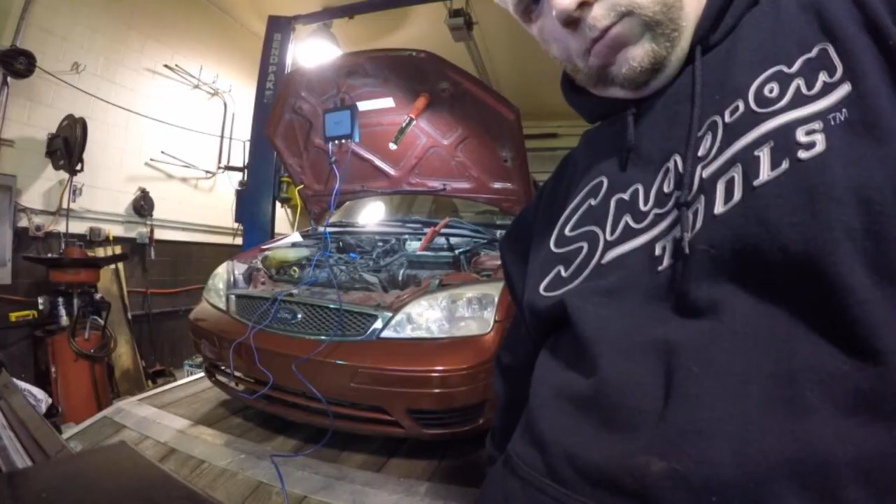All right. I don't know how much record time I'm going to get. I don't know how much room's on this SD card. But I have a 2005 Ford Focus 2.0, crank but no start. I do have a signal. Now let me try to find the crank sensor on this.

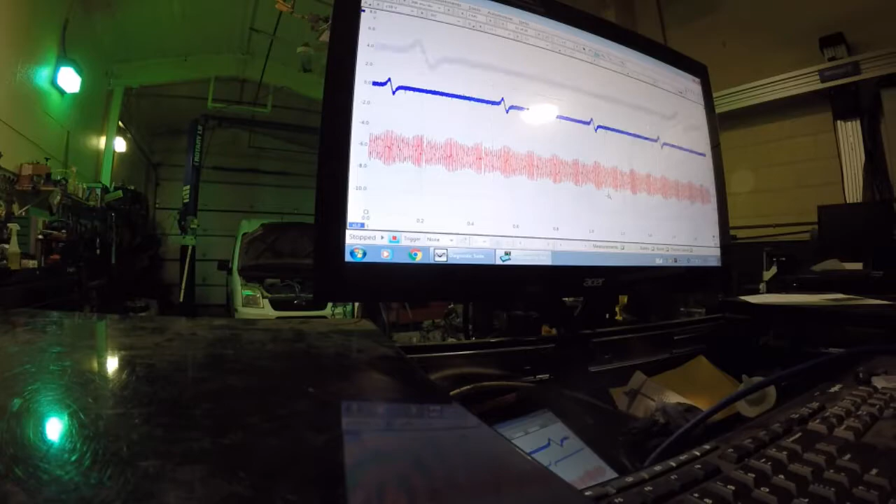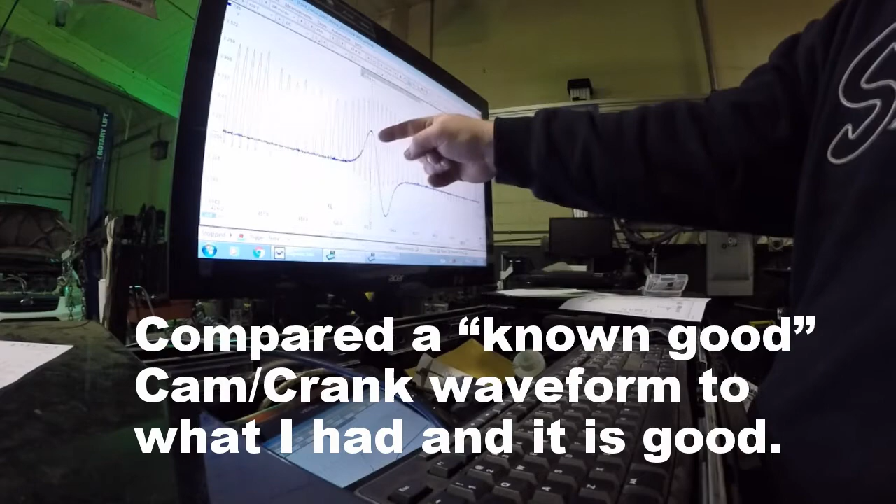Well, cam and crank signals are good. That's apparent. So let's go here. Let's zoom in and see what we get. Okay, so this is what I have. I did find a known good. This is perfect. I have 13 lines from my sync signal to the crest of my cam sensor. I have 13 pulses, which is good.

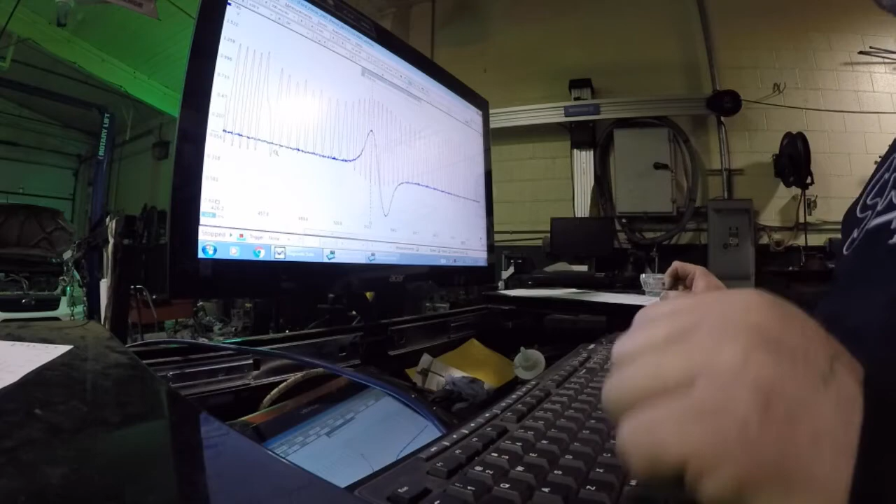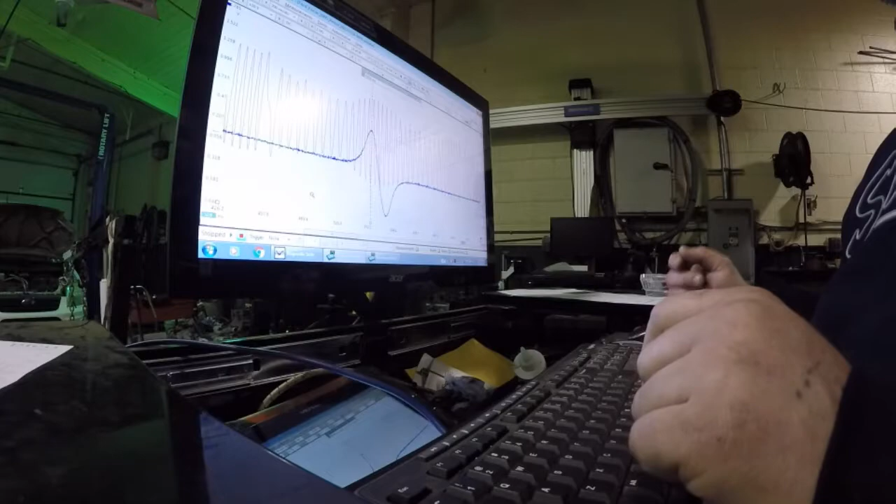The only difference I saw on the known good was the ramp on the sync for the crank sensor. It's opposite. It ramps up instead of down. But I think in his case, he hooked up to the crank signal wire instead of the signal return wire. I'm hooked up to the signal return wire.

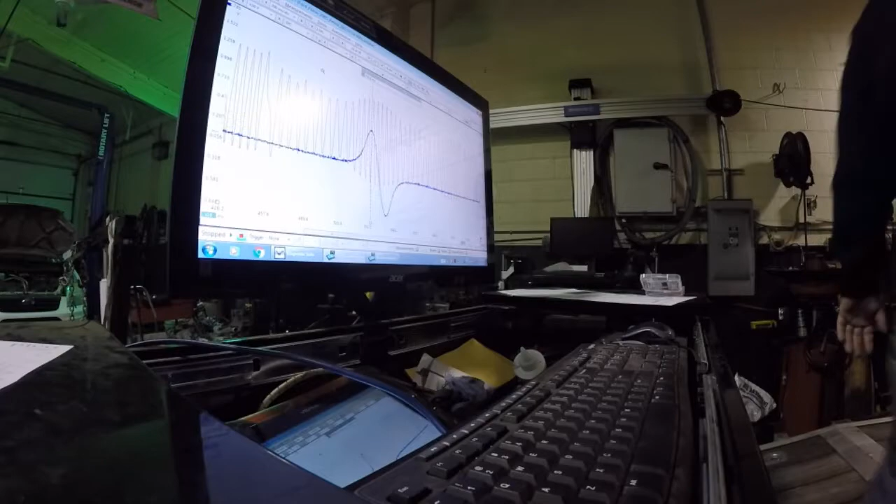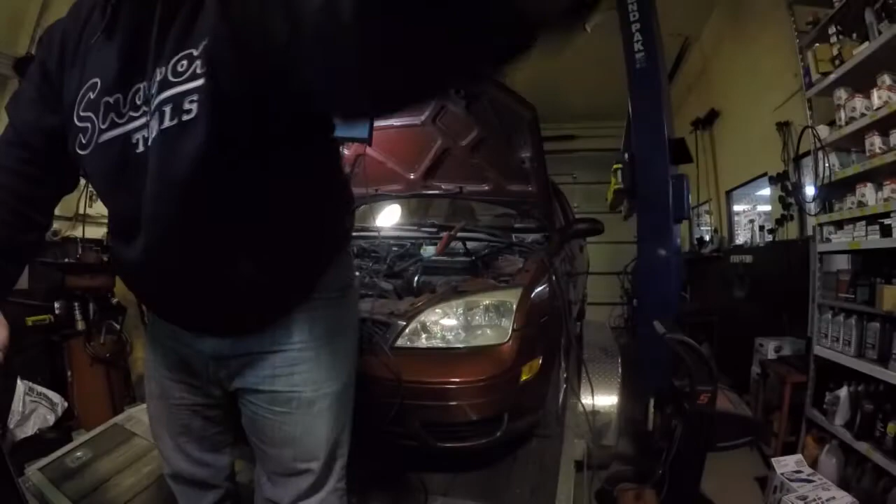That's why that's reversed. So now I'm going to hook up to the number one fuel injector and number one coil on the front. So I do need to hook up an attenuator for my coil. It's a 10-to-1 attenuator. 10-to-1? Yeah, 10-to-1. Okay. Whenever you're working with ignition coils, always use an attenuator. You can easily fry your scope.

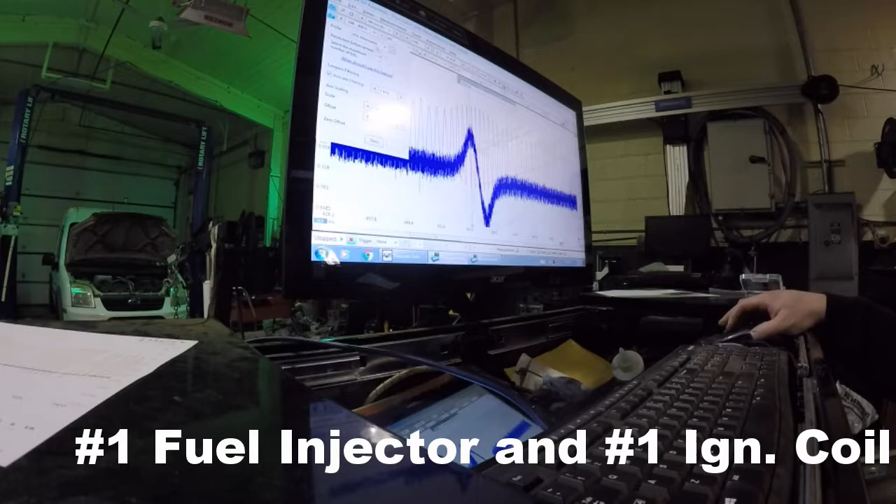Let's see. We're going to tell this we need an attenuator on one. It's a 20-to-1. Oh, it's a 10-to-1 attenuator. Sorry, 10-to-1 attenuator. And that's good where that is. This one here, we're good where we are, but we need to bump this up to 100, give or take 100 volts. Let's run it just to see where I'm at. Let's get rid of this. Okay.

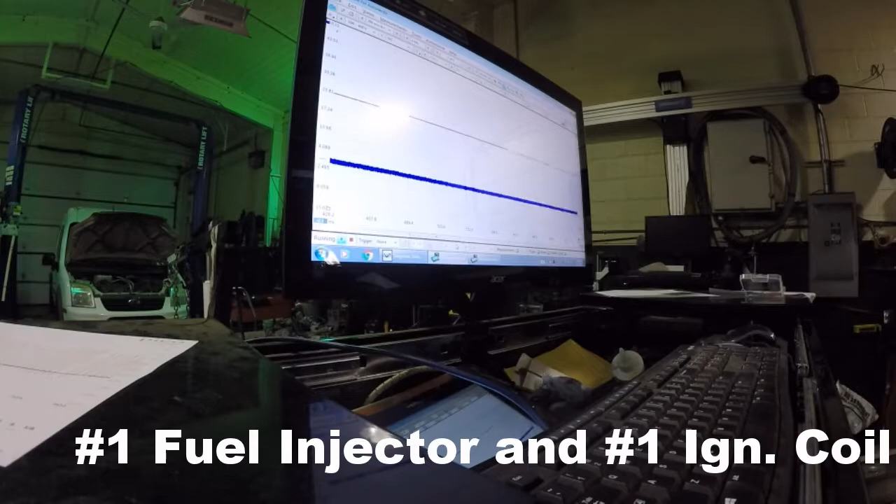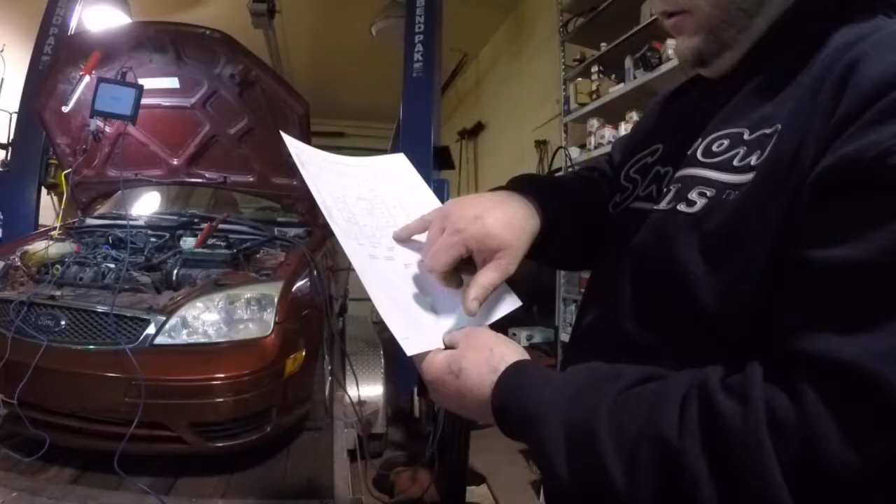You know, we can check one thing. Let me turn the key on. Because you see, I have 0 volts on both of these. And see, nothing changed. C1403. C1403 is the power hold relay. That's the relay that sends power to the injectors, to the coils, and feeds power to the computer. So that would be this relay right here.

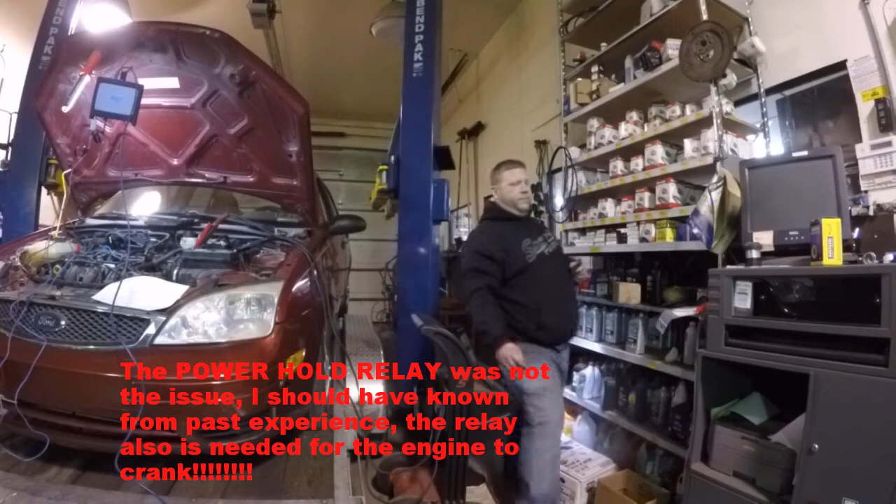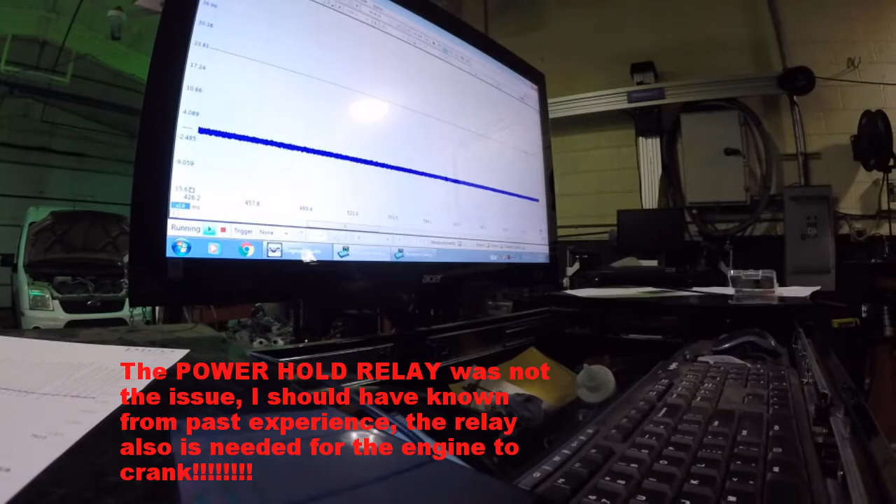I'll be able to tell as soon as I turn the key on. I'm going to focus you guys on here. And you'll see right now, you can check out the red wire. I'm at 0 volts, so that should go up to 12 volts as soon as I...

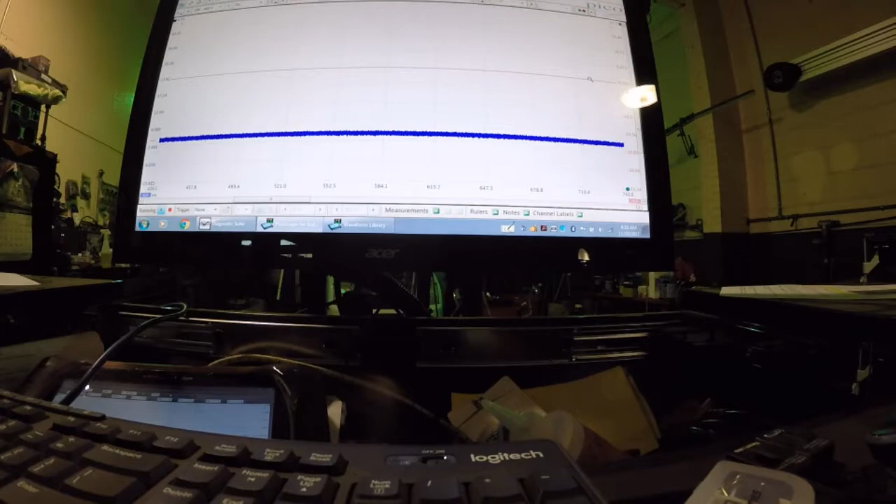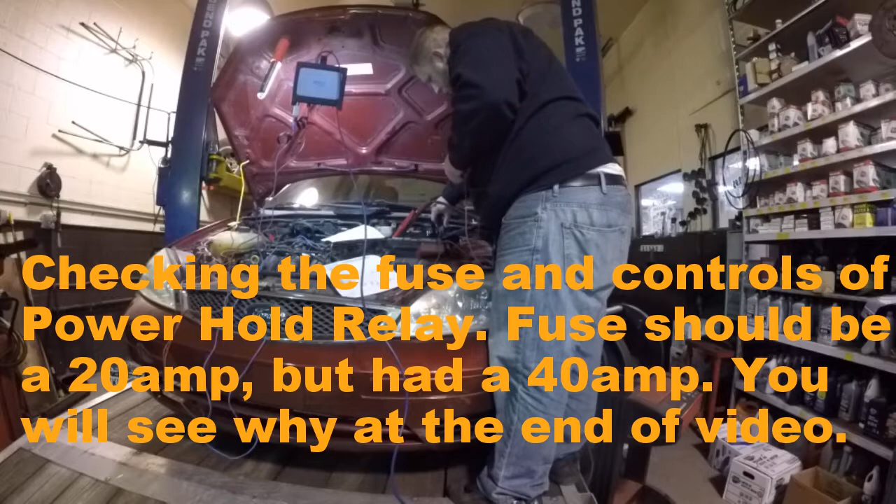Okay, well, I found the fuse. It's supposed to be a 20 amp maxi fuse, fuse number 9 in the battery junction block here under the hood, but it has a 40 amp fuse in there. 40 amp range, which has me concerned. And this should be power at all times, so 12.7 volts and 12.7 volts. Okay, so that's good.

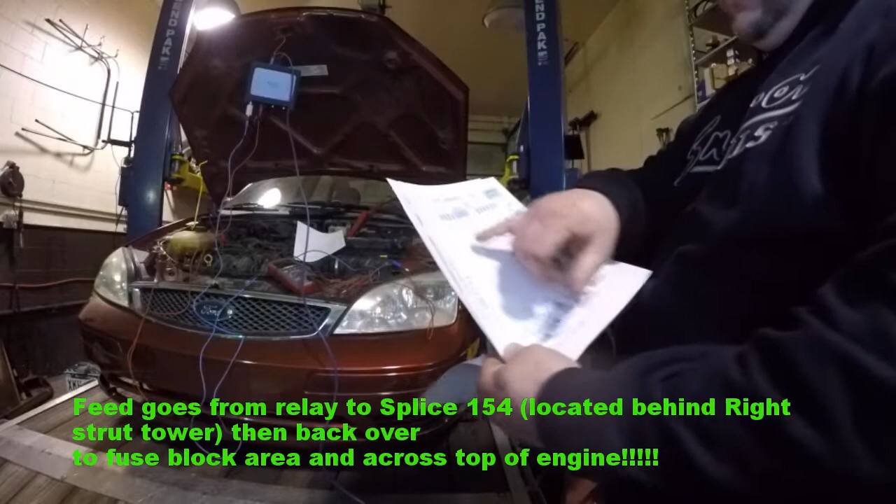So right now I know I'm not getting any power to any of my injectors, any of my coils, nothing. So it's a power feed problem. Here in the beginning, from the power relay, the power feed goes down to splice 154. This splice is down near the washer pump motor. And from there it splices off and goes to the computer; there are 2 feeds from the power hold relay into the computer. We know this is all good.

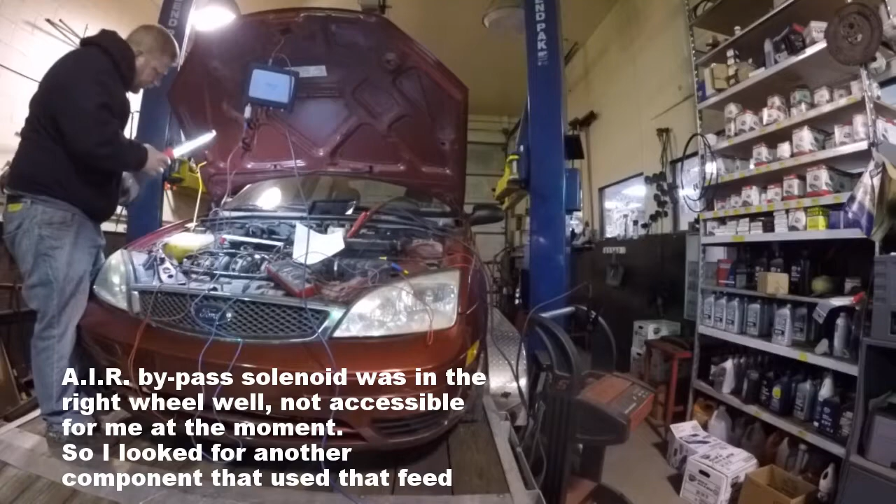Down to this splice has to be good because the engine cranks. If I pull that relay out, the engine quits cranking. So that tells me the computer relies on these 2 power hold relay feeds going into the computer. Secondary air injection bypass solenoid at right side of engine compartment. The right side. Yeah, I do not see it anywhere here. It has to be talking about down in that wheel well.

Well, I guess we're gonna go a different route. All I really want to do, I just want to see if anything else is getting power. Injectors and the coils and stuff, and the other one comes down and feeds the intake manifold runner control solenoid on the intake manifold. And then it also splices off there and feeds the intake manifold tuning control valve, or tuning valve, which is on the intake system. So I'm going to focus on the runner control solenoid. See if I can find that.

So my red trace I'm focused on here. See if I have any power. Yep. And you can see I have my 12 volts there. So I'll bring my cursor down here so we can actually measure it, and we're at 12.56 volts. So as you can see, I have power on those wires. My problem is somewhere from that splice.

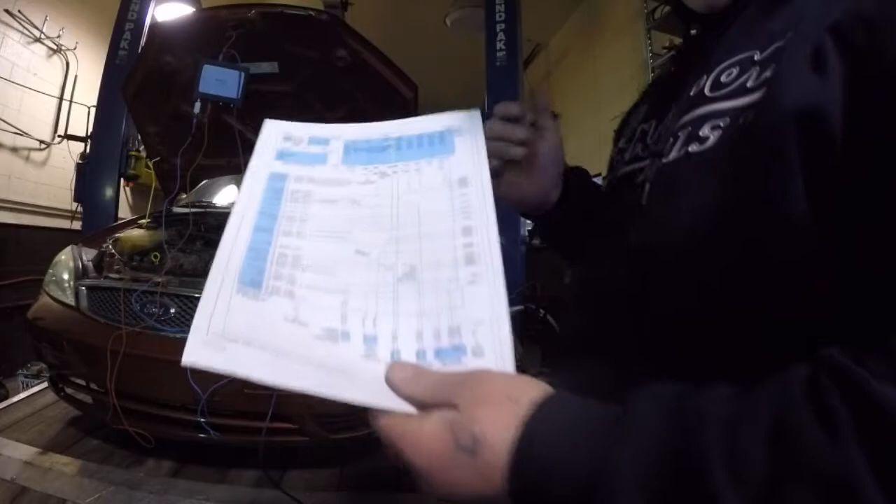I'll show you my splice. Here's my splice 154. From there, obviously I know I have power going back to the PCM because it does crank. And I have power from this splice to the intake runner control solenoid. But I have nothing on these other wires. It can't be a shorted wire, because if it was, it would actually short the power all the way across. So it has to be an open wire.

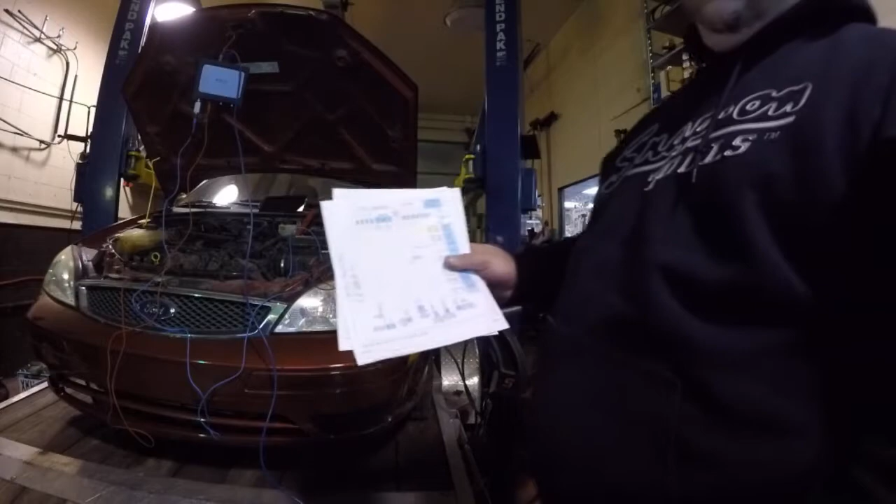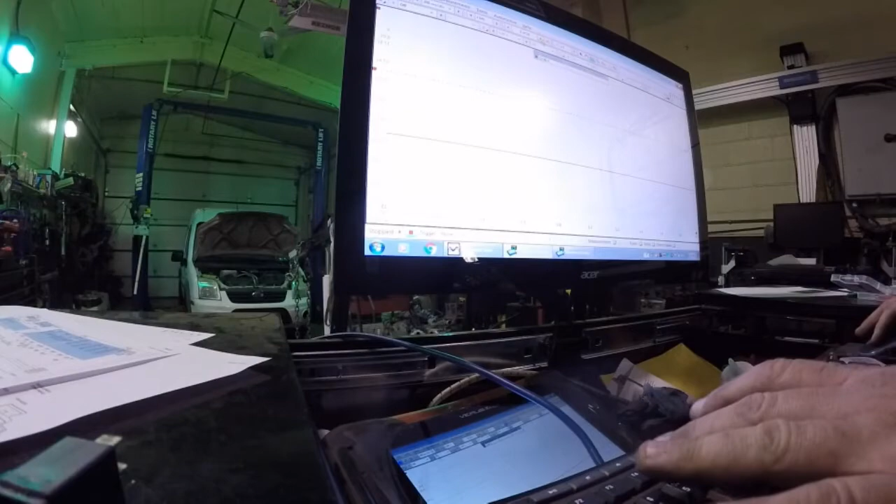Let me go back. I'm going to show you when I first turned this thing on. What the heck? Oh, you know what? There we go. Let me take that filter off now. Okay. Here, you'll see when I first turn the key on, see I get all this. That's telling me that there is corrosion somewhere on this wire.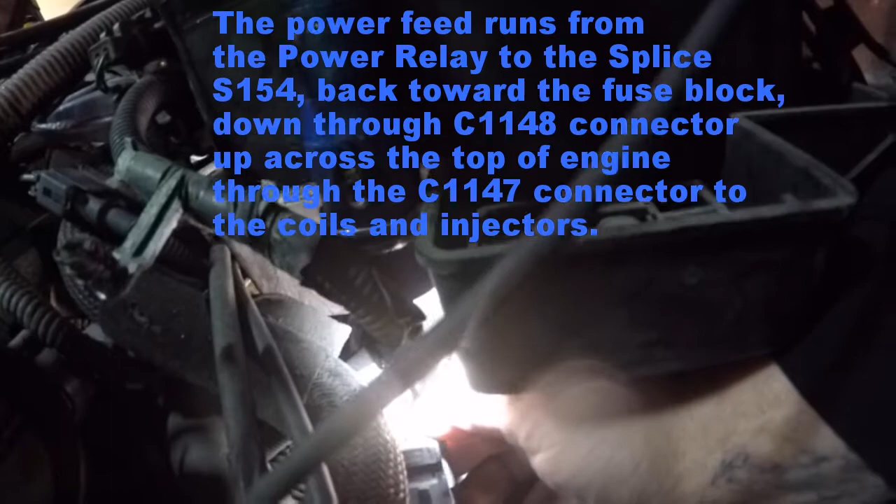Well, easy enough. I found the problem. I'm actually surprised it didn't blow the fuse. If you look right in there, I'm going to try to get this light in. Then you'll see the wire. And sure enough, that is a green and light blue wire. And this is connector C1148. You can see that wire is completely broken. It might be connected by one strand. Nope, it's connected by no strand at all. There's the problem.

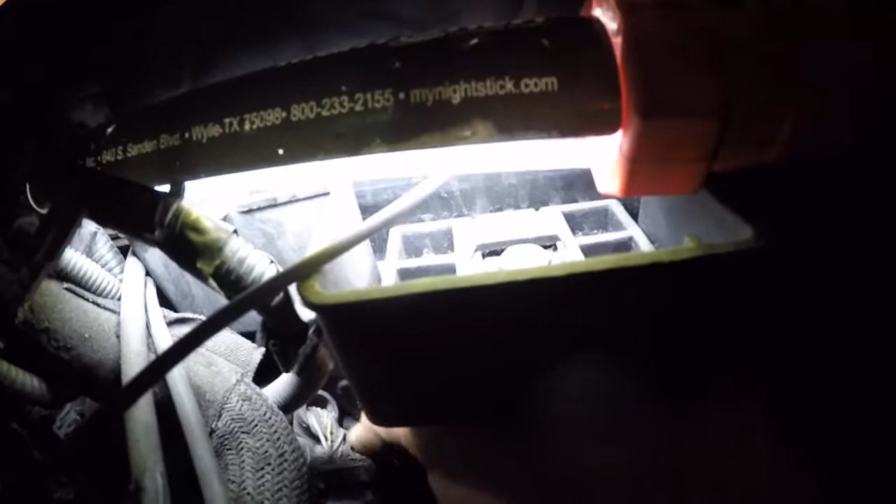I don't know if my light might be too bright. So I can get this one over there. It's not quite as bright. But as you can see, here is the problem. I shouldn't try to pull the wire off all the way because there's nothing. Whoop. As you can see, I have power on that wire. These are the sparks. But that's where it's broken right there. So I will fix that and she will run.

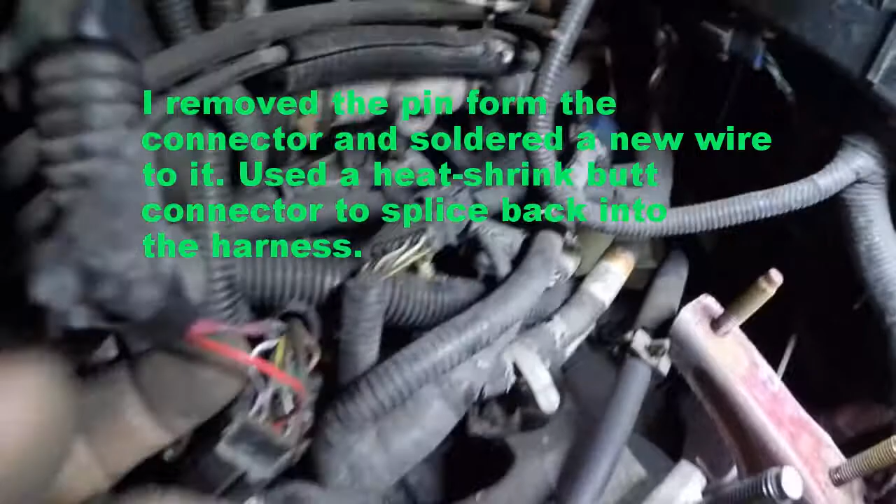So here's the wire. It was broken. See, it's a green and light blue wire. Can't see the light blue though, but it's green. It's under the bottom here, and it's hard to see. But there was the fix. I'm gonna throw the battery in it. Battery.

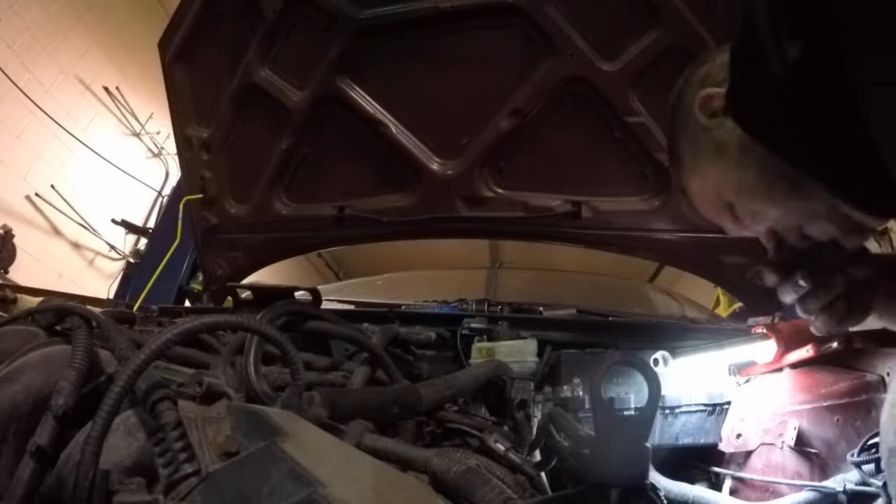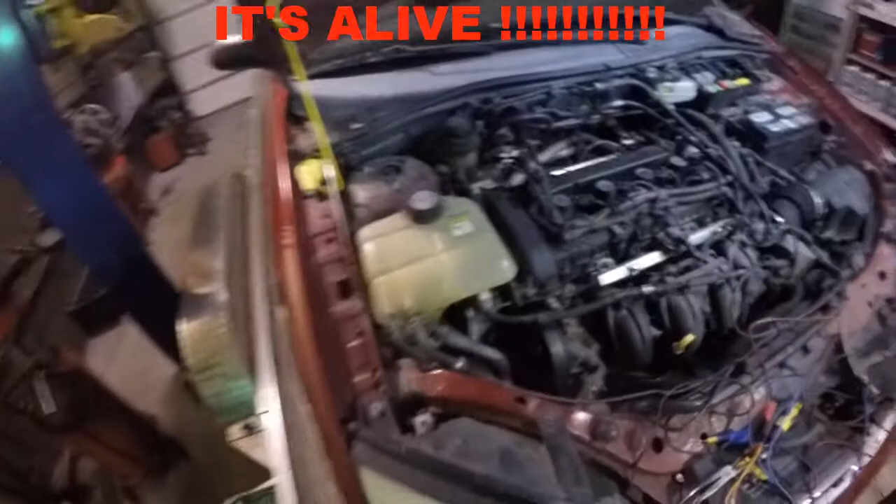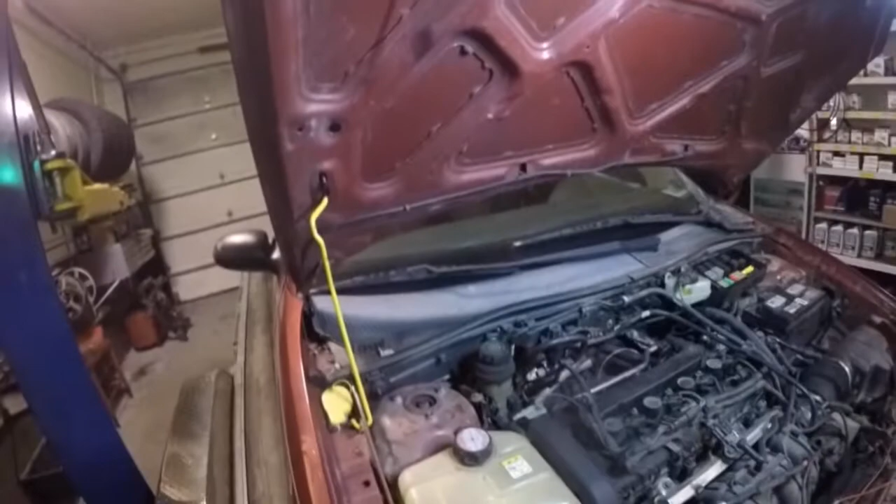Show you this fuse. This fuse here is supposed to be a 20 amp, but it's a 40 amp. I'm guessing what was happening, this fuse kept blowing, so they just put a bigger fuse in it. Well, she's running. She is running. No tach, no check engine lights or anything on. She's running, so we'll go ahead and shut it off.

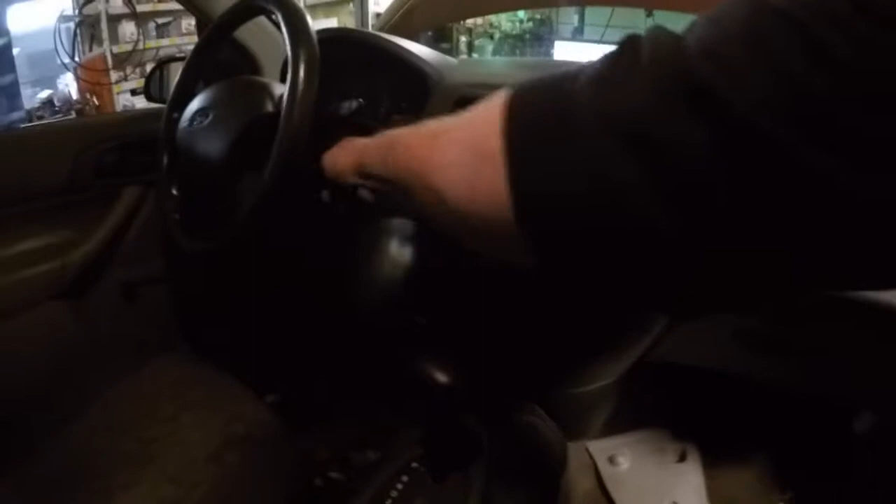I don't know if I'm really gonna be able to. Oh yeah, I can. Barely, but I can. I'll fit this light down here. You can see the wire that I fixed, the red wire. Actually, from this angle, you can see how close that wire is to the battery bracket. That's actually what happened, it rubbed on the battery bracket.

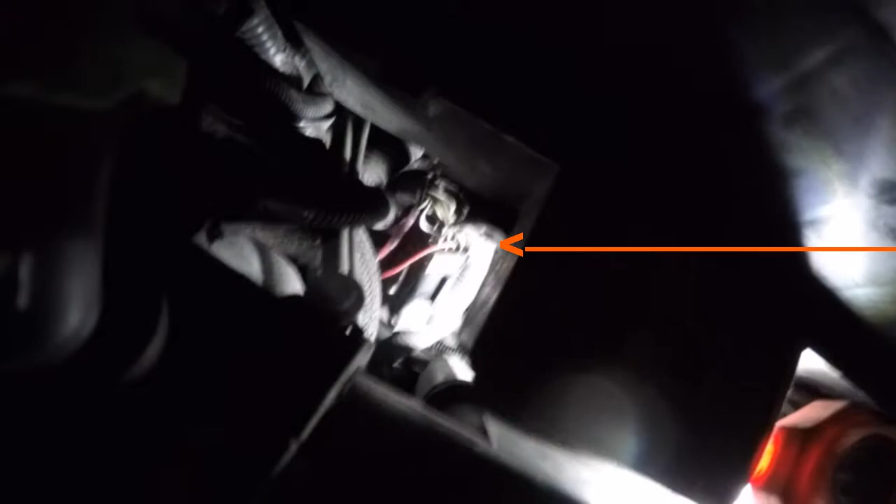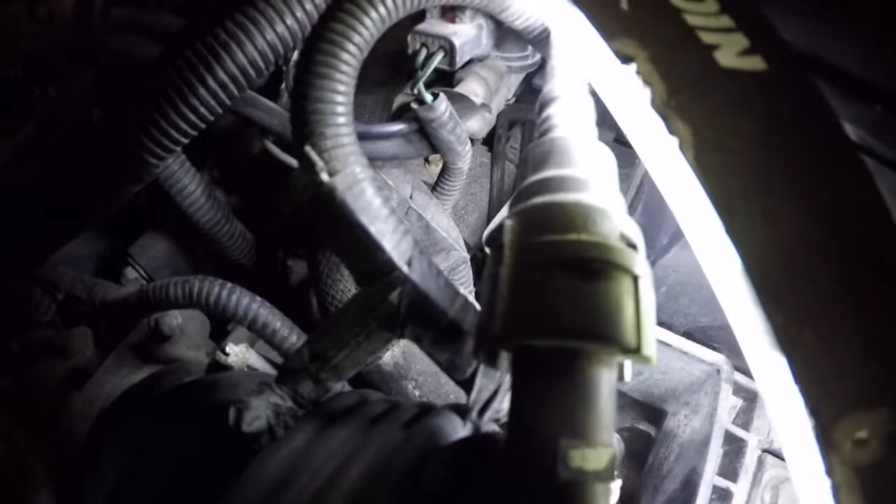Actually, now that I look at it, I think that thing clips into the battery bracket. But it is not going to reach for some reason. But yeah, I mean, that is a fix. I'll zip tie that to that other harness so it doesn't touch again.